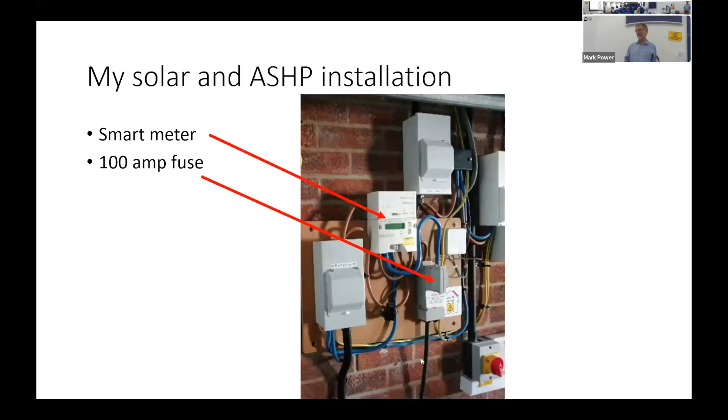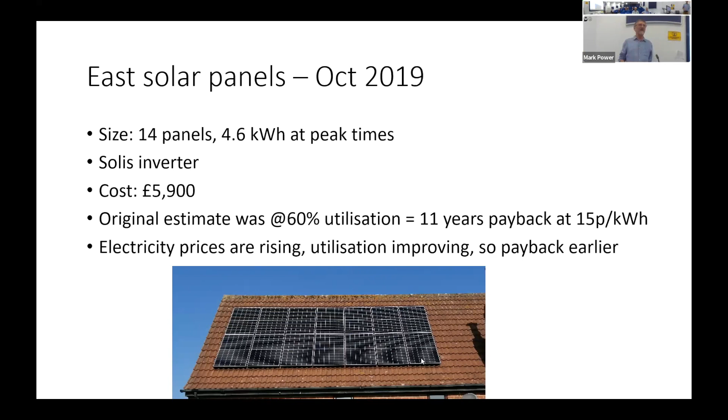Here's a picture of my solar panels facing just south of east. I've got 14 panels on this roof. It's quite a steep pitch to the roof, and it can deliver 4.6 kilowatts at peak. I have a Solis inverter, and the total cost for this system was just under £6,000. The original estimate was that I would use 60% of the energy generated, and at the price of electricity then, 15 pence per kilowatt hour, it would take about 11 years to pay back. However, electricity prices have been rising, and also I believe my utilization has been improving because of my batteries. So my payback should be earlier, and I'll cover that a bit later.

So my original estimate was I'd generate 3,500 kilowatt hours per year. And in the first 12 months, I actually generated 4,000, so it was pretty good. But you'll remember in April 2020 and May 2020, it was a very warm, sunny spring. So you can see that on the line above the blue line. There's a lot of generation in those months.

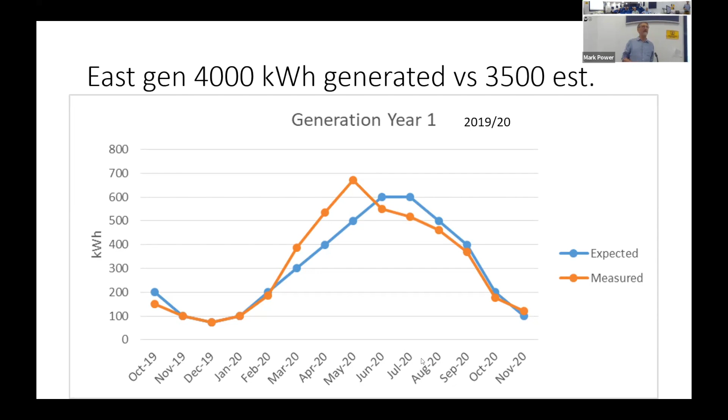I then revised my estimate upwards, and my generation for the next calendar year was just underneath, just 3,670 kilowatt hours. Maybe it was a slightly cloudier summer. But the following year, I was actually over the 4,000, and you can see it was pretty well matching my prediction. So I was quite pleased with that.

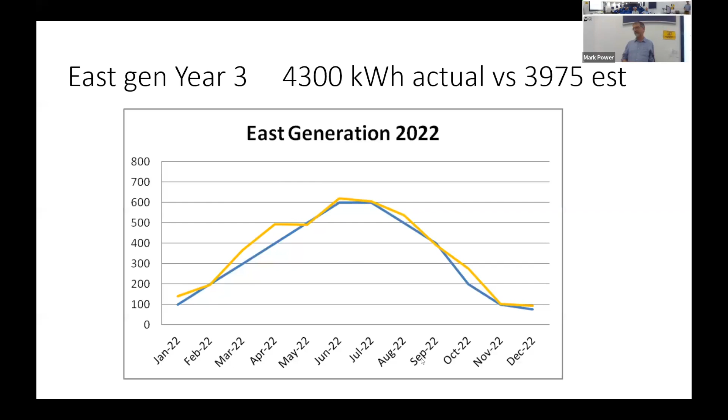I then fitted the solar panels on the west side of the house, and I went for 12 panels, generating 4 kilowatts at peak times. And I have a Solax inverter plus the 12.6 kilowatt hour batteries. And you can see the battery management system on top of one of the batteries there. There are 2 batteries; a third could be fitted.

I believe a battery is very important if you've got solar plus air source heat pump. You need to have full management of your power, because you can couple that with peak, off-peak cheap electricity. And this all makes the economics work when I'm changing from gas to electric heating.

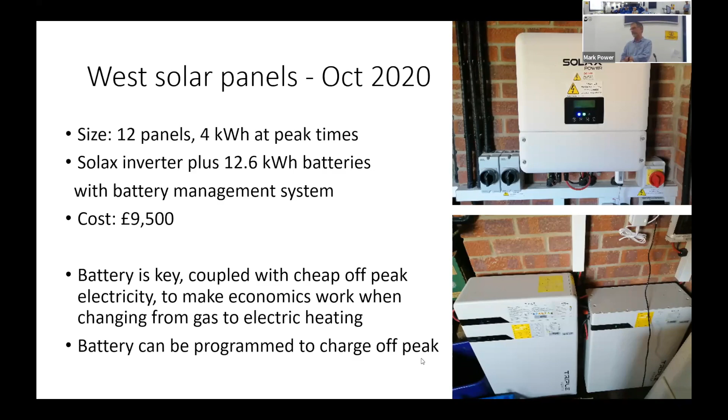So the west-facing panels, the estimate was just over 2,500 kilowatt hours per year, and I pretty well matched that. And in year 2, it was just above that. So my estimates are pretty accurate. I'm quite pleased.

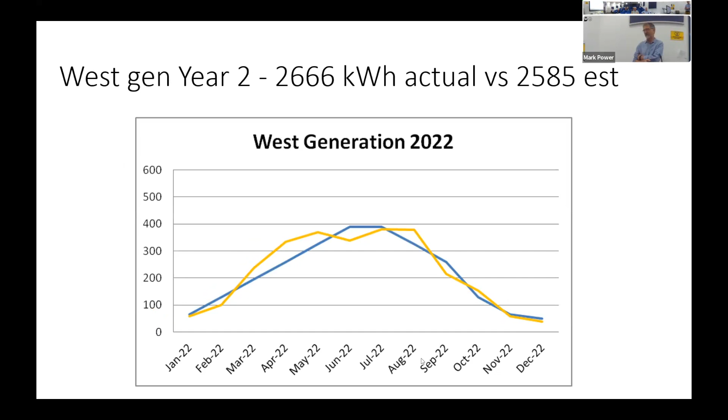And then if we look at the total systems now, when I've had the 2 systems running together, I estimate to generate about 6,500 kilowatt hours. In 2021, I was just below it, but in 2022, I was just above it. So all in all, I think the estimates are pretty good. And month by month, it's working out to be fairly accurate.

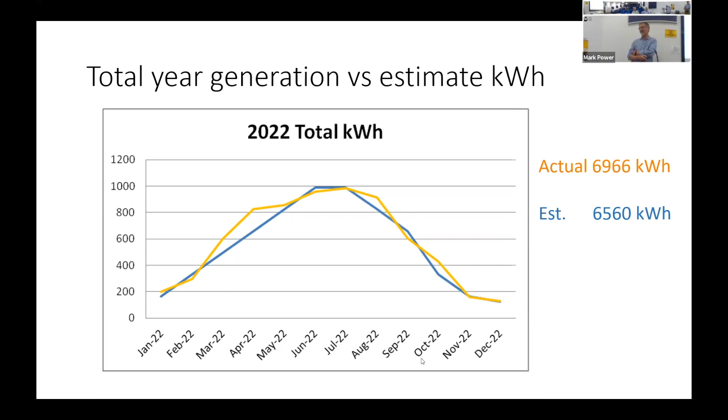So a bit about the old gas system. It was a very old gas boiler, which was probably installed as per original. It was obviously inefficient, being so old, and it was due for replacement. Obviously, it was burning gas and emitting carbon.

But I also found that because the gas central heating comes through with a lot of hot water through the radiators, you get a burst of hot air coming off the radiators. It just goes straight to the ceiling. You have the top half of the room hot, and the lower half, your feet, remain cold. So it was never just right. It was also controlled by a fixed thermostat in the hall, which was the coldest point of the house, and it wasn't really compensating for the changes within the house.

So the house is a 4 or 5 bedroomed detached house with a floor area of 170 square meters. The energy performance certificate gave the following data. So for heating, I'd use just over 17,000 kilowatt hours per year, and for hot water, just over 4,000 kilowatt hours per year, giving a total of 21,500 kilowatt hours per year, plus also some gas which will be used for cooking. And then on top of that, there's some electricity for the house itself.

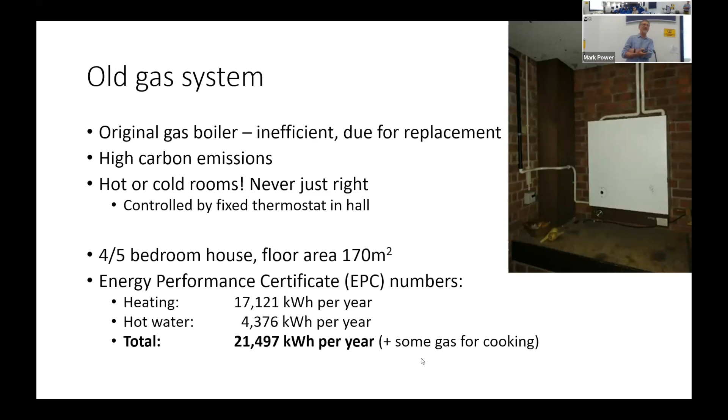The air source heat pump itself was sized at 8.5 kilowatts output, and it cost £14,600. That included the air source heat pump, a new hot water tank, and 6 new radiators. But it did use the existing pipework for the radiators. I had to have new radiators because the whole air source heat pump system operates on a cooler temperature, so the radiators have to be suitably sized to get the heat into the house.

I was lucky that I could make use of the Renewable Heat Incentive subsidy, and that is going to repay me £11,400 over 7 years. That subsidy is no longer available. It's a flat £5,000 now.

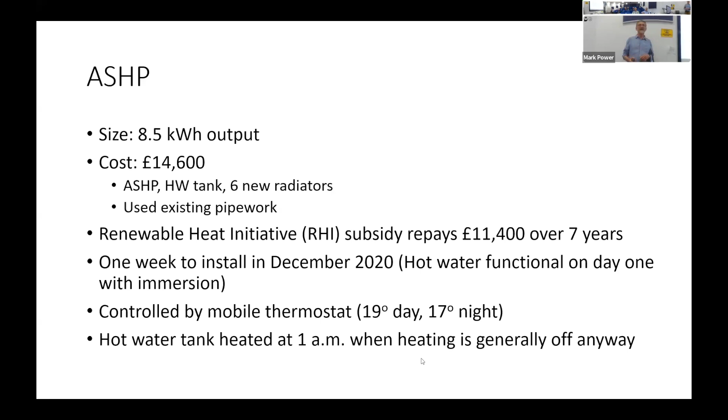The hot water system I've got coming on at night. The air source heat pump can't heat the hot water and the central heating at the same time. So generally the central heating is off overnight, therefore we'll just put the hot water on. So the benefit of that is I've got an off-peak electricity tariff in the middle of the night, and so it's cheaper to run. And in the summer, I'm using the energy from the batteries that I've stored from the solar in the day. So hot water heating is becoming very cheap.

Here's a picture on the left of the old tank. It didn't have an immersion heater. This is showing it with the cladding removed. And on the right is the new hot water tank. It's a pressurized system, so the shower is much better pressure. I had to actually reduce the pressure so it wasn't too much and wasting too much water. But I'm very pleased with the pressurized system.

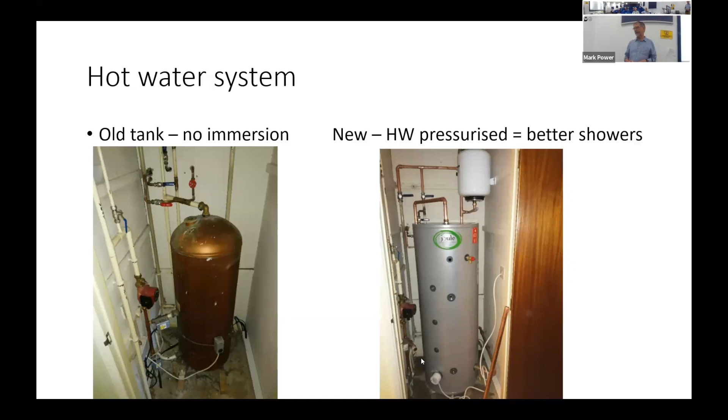In the loft, I've got a buffer tank. This allows the heating system to respond more quickly because there's already a reservoir of hot water. Not all air source heat pump systems have a buffer tank, and so I don't quite know. I think there is a benefit, but whether there is financially is something we don't know yet. But the cold water tank was removed, and on the right you can just see some of the pipe work, which is all insulated up in the loft.

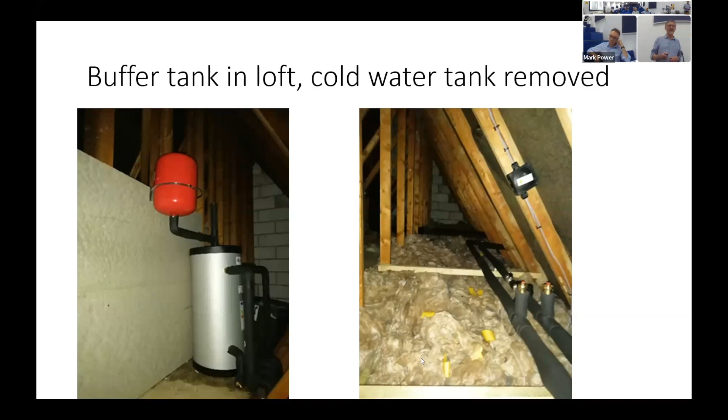The air source heat pump itself, it's very quiet. It's fitted in a corner of the garden on the north side of the house. Okay, that's not ideal because it's not the warmest point, but actually it doesn't seem to be making an appreciable difference. It's still working very efficiently. It shouldn't be near a window, and you can see there it's up against the fence and a blank wall, but in fact it's very quiet, and the living room next door to it, you can't hear it at all.

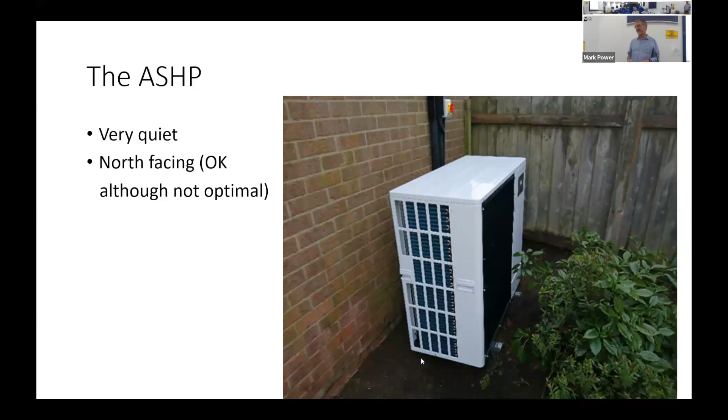All the systems are connected through the internet, so I've got lots of apps that control through MyEnergi for the solar, the heating system through MEL cloud. Solax is the battery management system, and also the thermostat control. It can all be done from my smartphone. And all the data that was generated, I recorded during the lockdown periods daily, so I have very good data over a 2 or 3 year period.

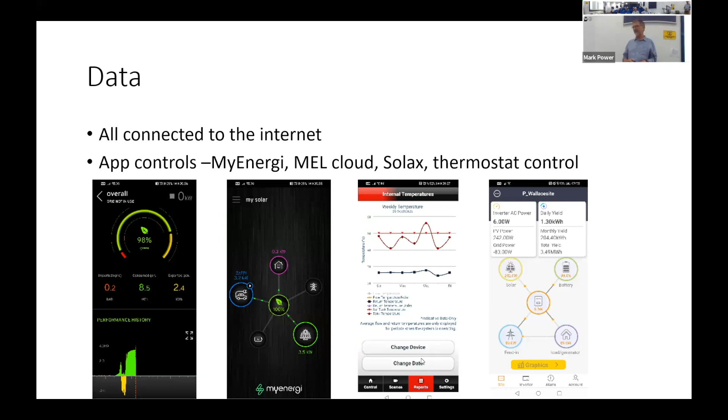So as I mentioned, the battery is a manageable one, so I can set the times when it is charging. I can do that twice a day with the Solax system. So I can fill the battery in the winter at night using cheap electricity, and then that will discharge during the day. I can also recharge my electric vehicle at night, and Octopus give me a very cheap rate to do that because I'm an EV owner. In the summer, I charge the EV from solar.

On my mobile thermostat, I can set my room temperatures up to 4 times a day. So I can have it cooler at night. I keep it about 17 degrees at night and then 19 degrees in the day. So it's a much more uniform temperature, and the house is kept within that boundary; it should be within 3 degrees over the 24-hour period. That's the way that an air source heat pump is best managed. So you have a much more uniform temperature within the house.

It's not fluctuating. And the temperature that's circulating through the radiators varies depending on the amount of energy that the air source heat pump is putting into the building, and it's extracting the energy from the outside air and pumping it into the house. But the radiator temperature will vary from maybe 30 degrees up to 45 degrees. And this is on a compensation curve. I can adapt that, I can change it on the control system. But it seems to be working pretty well for me.

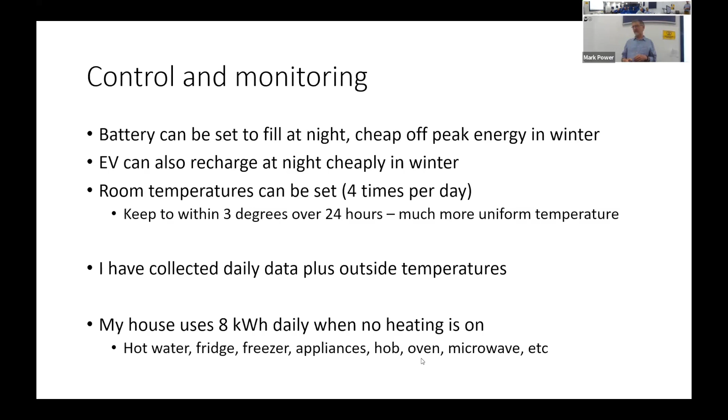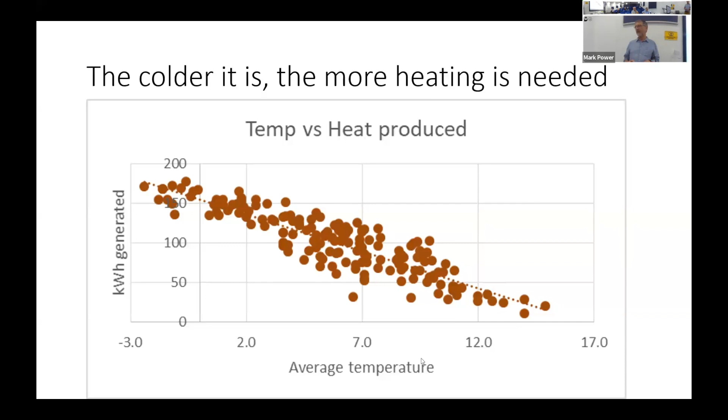Now, the other factor of an air source heat pump is it's not the same efficiency. It changes with the air temperature outside. So when it's colder, it's less efficient because it's trying to extract energy from a cold air temperature. So down at -3, it was a coefficient of performance of 3, but I'm getting an average over the year of 4, and you can see when it's warmer, it's up near a 5. So my COP, coefficient of performance, is averaging over the winter about 4.

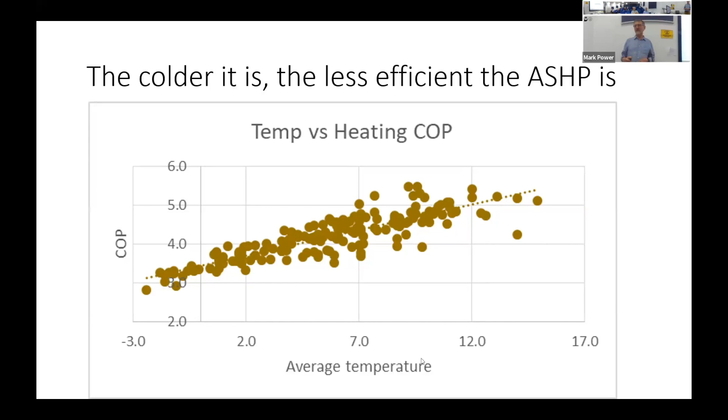If you put those two factors together, this is the actual energy used. So the air source heat pump is using 50 kilowatt hours per day when it's very cold, and that will fluctuate maybe up to 60 or so when it's very cold. But when it's mild, it's running down towards 0.

I've been logging this for a number of years now, and I'll continue over the next few winters to see if there's any change in the performance of the air source heat pump. For instance, if I maybe notch the temperatures down 1 degree or so, does that have an effect?

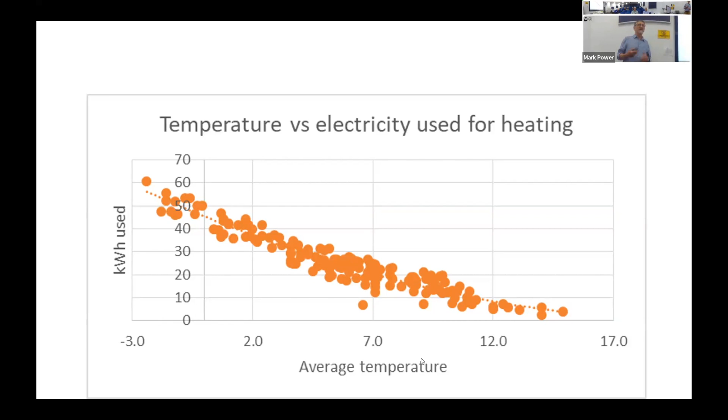So here's a picture in that very cold period a couple of years ago. We had snow drifts coming in, and the air source heat pump worked perfectly well. You can see on the right the grill at the back was frosting up, and what it does, it senses this and it just reverses the whole system. So it then pumps the hot water through those pipes and defrosts itself. So it manages all that internally.

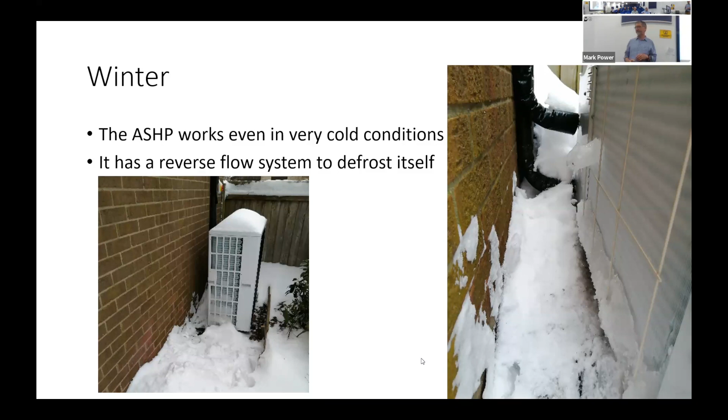So coming back to comparison with the gas system, the electricity used and consumed versus the hot water and heating. So the gas is the grey vertical bars, as seen before, and the orange line is what the air source heat pump is estimating it's putting into the house. This is based on the flow temperatures and the flow rate. And you can see in the summer, obviously the heating is off, but in the winter, it's coldest in January, February, March, and so more energy is being pushed into the house. And the blue line lower down is the actual electricity consumed to do that. So that's a true figure.

And you can see the two systems are matching fairly well, that the amount of energy that the house requires to be heated is similar under the gas and the air source heat pump systems.

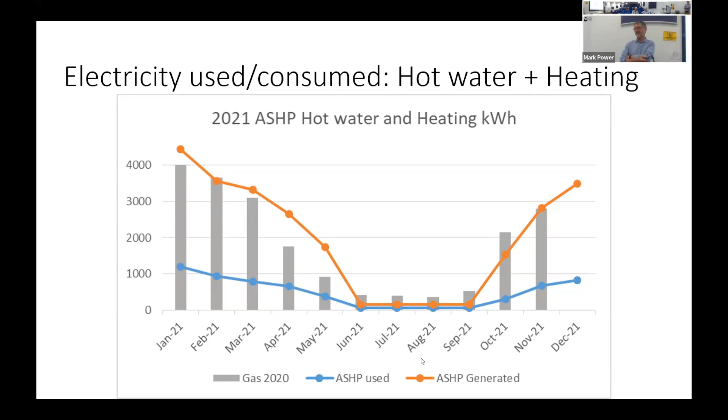And of course, the solar fluctuates day by day. Get a cloudy winter day, you get virtually nothing. And then a nice crisp cold day in the winter, and you can generate a reasonable amount. It does contribute, but in the winter the solar system isn't really giving anywhere near enough to run the air source heat pump.

So on the tariffs, I'm on Octopus. In the winter I'm on Octopus Go. It's a tariff designed for electric vehicle owners, and it gives a cheap rate for 4 hours at 7.5 pence per kilowatt hour. I can export, but not at a very good price, only about 4 pence per kilowatt hour, because you can't have your cake and eat it. They don't give everything away.